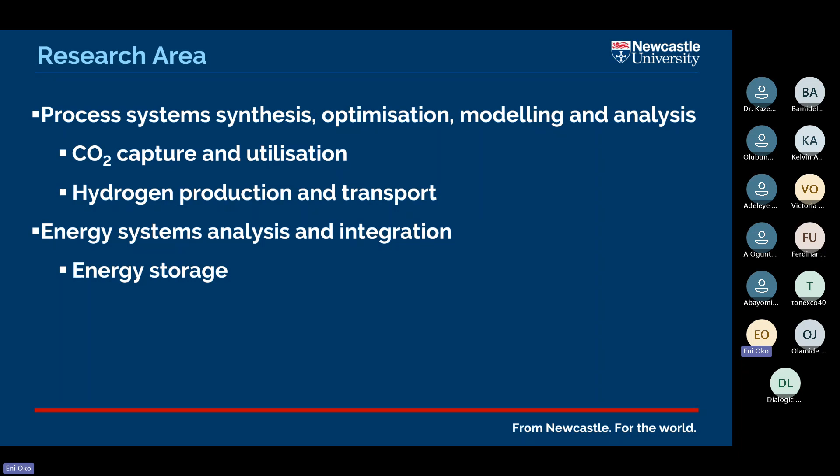On the hydrogen subject, in the past 4 years I've had a number of funded projects, and some of the results I'm sharing today are picked from different projects that we have completed in the past.

Most of these projects are done now, except the first one, which started last year in December. It's a EU Horizon funded project led by myself, but as the technical lead, we had to give up the admin lead of this project to EU partners because of Brexit requirements.

This current project is actually on renewable fuel production with partners from China. We'll have around 4 partners from China, 2 partners from South Africa, 2 partners from Nigeria, 2 partners from Europe, and 4 partners from across United Kingdom.

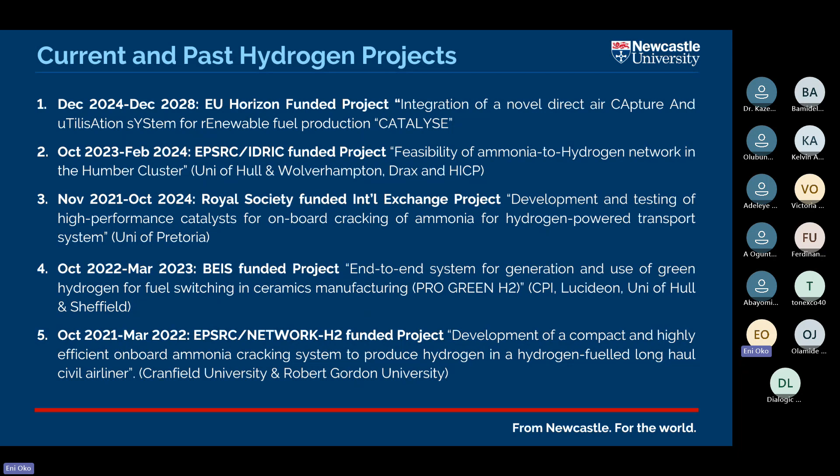Before I get into the rest of the case studies, I thought it was appropriate that we have some kind of background talk to understand the facts that underpin the research that we are doing in this area.

So obviously starting from climate change and whatnot, many countries, including China, have set a target to reach net zero, and most of the targets for many countries fall between 2050 and 2060. Because we are Nigerians, it's also important to highlight that Nigeria has also set a similar target for 2060.

These targets, as I presume everybody on the panel knows, are based on modeled pathways for climate mitigation. On this figure, you can see different modeled pathways. The no climate policies pathway shows that Earth's surface temperature could rise by as high as 4 degrees C, which will be catastrophic.

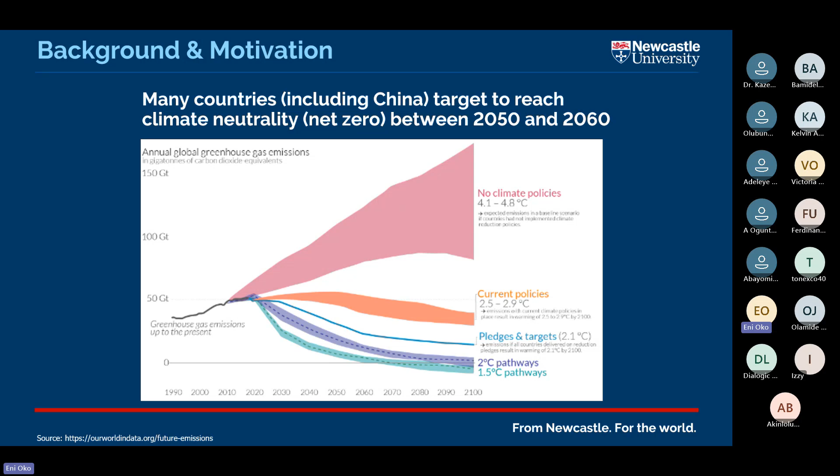Then you have the IPCC pathways, which are the 1.5 degrees pathway and 2 degrees pathway, which highlight that very serious measures will have to be in place to drastically cut down carbon emissions, to keep global warming, Earth surface temperature rises, below 2 degrees C. This is the aspect of these developments that relates to technologies - it's actually where my research fits in.

This is also a bit of that, just providing more context. The IEA has already modeled a portfolio of technologies that would need to be implemented to achieve different scenarios, each of those IPCC UN scenarios, either the 2 degree scenario or the beyond 2 degree scenario, which is the 1.5 degree scenario.

So the key thing for us is that the Intergovernmental Panel on Climate Change, part of the United Nations, is pushing towards the 1.5 degree scenario, which now recognizes fuel switching as a key tool that will have to be in place to achieve this target. So fuel switching means we have to completely move away from the sort of fuel that we use today.

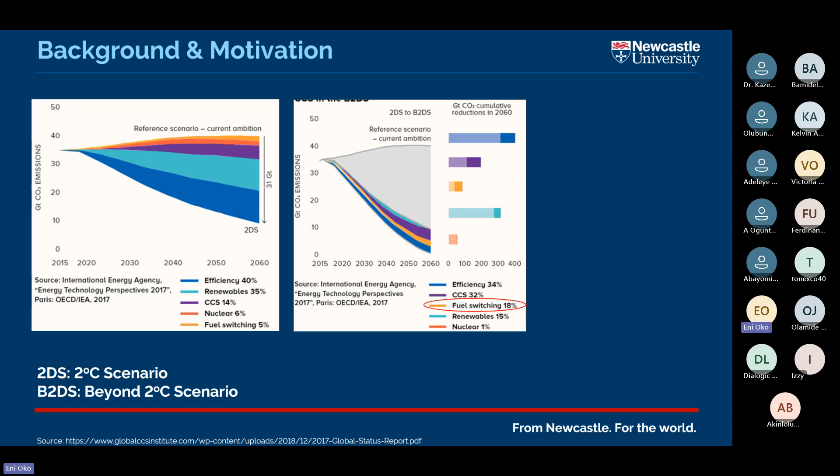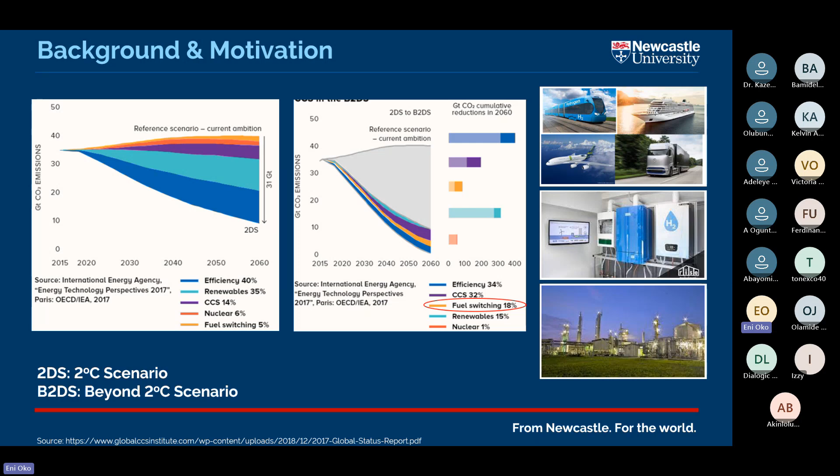And the extent of the implementation could be as much as 18% worldwide to achieve this. This is important because there are some sectors considered hard to abate. Starting from transportation, they are quite difficult to mitigate given the very nature of how they operate. And of course for the UK, for instance, domestic heating and industrial processes, we can't run away from finding an alternative type of fuel to replace the traditional fossil fuel used in these sectors currently.

So it is within this context that we find hydrogen. Hydrogen has very high gravimetric energy density. You can see on this figure that the gravimetric, weight-based energy density of hydrogen is actually higher than what you will find for all the traditional fuels that you can think about.

It's way higher. At the same time, it's important to also note that if you still look at this figure, you find that the volumetric energy density of hydrogen, which is the energy per volume, is actually very low. This is part of the problems I will talk a bit more about today.

So hydrogen has become a very popular option. One, because of the high gravimetric energy. Two, because on combustion it produces only water without any CO2. So worldwide, hydrogen is now considered as a possible alternative, a very excellent one at that, to fossil fuel.

But the hydrogen must come from low carbon sources, and this is why you will find different colors being associated with hydrogen. If you look at this figure, you will see hydrogen is associated with different colors, and that is often linked to the source of hydrogen. In the case of low carbon options, the expectation is that hydrogen will come mostly from electrolysis.

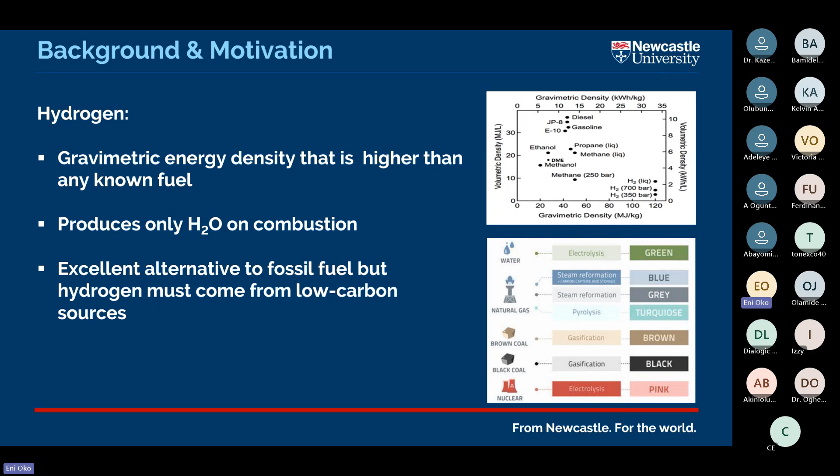Worldwide, different countries now have hydrogen strategies in place. The United Kingdom, China, for instance, the US, Canada, South Africa, Algeria, and in the Middle East. I think around 64 countries now have a hydrogen strategy in place. In Nigeria currently, there is no clear government-backed hydrogen strategy in place.

Although there are some activities ongoing in that regard, and hopefully there's going to be one very soon in Nigeria. I will also highlight later in my presentation why a clear hydrogen policy is very, very important for Nigeria as a country. For the UK and Europe, the objective is essentially to scale green and blue hydrogen production by 2030.

There are several projects ongoing in the UK and Europe in this area. The UK already has around 15 hydrogen filling stations in operation currently. In the UK, sometime last year, there was a plan to do a trial for domestic heating using hydrogen, somewhere in the Teesside area, around Redcar, a village there. But this didn't go ahead because there was a lot of protest against using hydrogen for domestic heating, so it was called off.

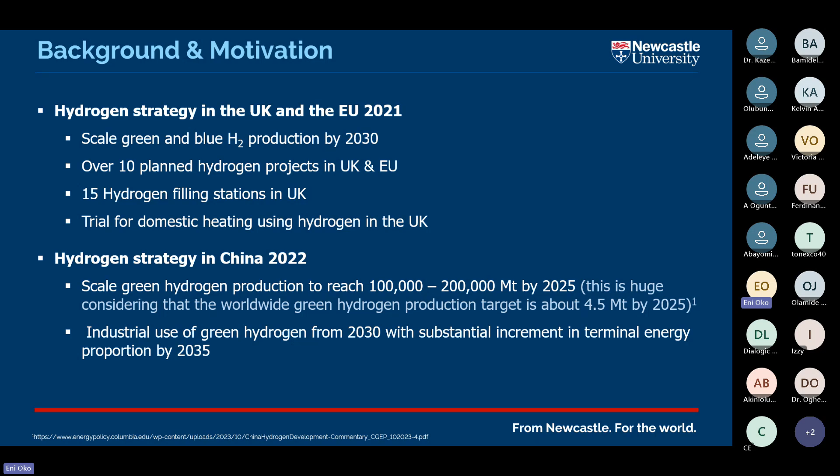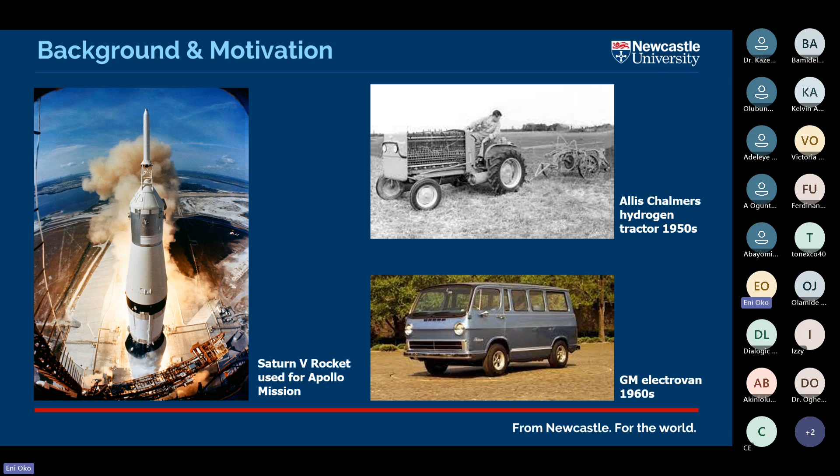What is new is that globally, the interest now is to create a new energy ecosystem that will be completely powered by hydrogen. This new energy ecosystem is what you often hear referred to as the hydrogen economy. So it's not just building specific devices, equipment, or technologies that use hydrogen, but building an entire energy ecosystem, looking at the entire flow, the entire supply chain of energy systems, both at national and international level.

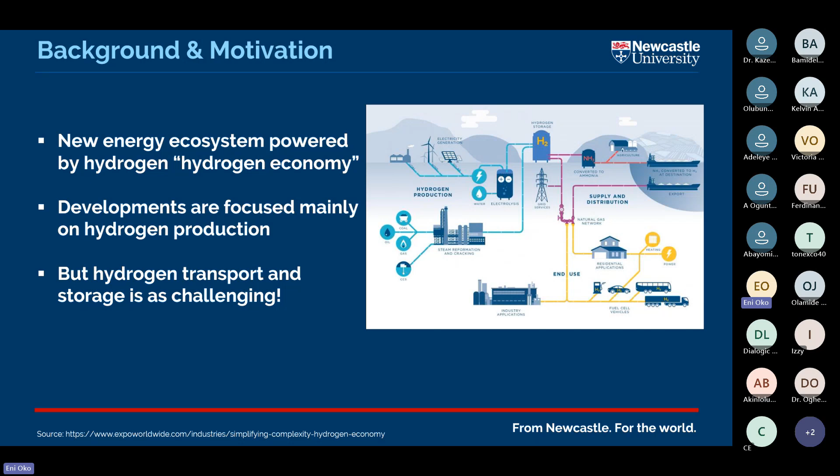Hydrogen transport is challenging, and I want to highlight what makes it very difficult. The first thing is that the volumetric energy density of hydrogen is very low. If you go back to this figure I showed earlier, depending on the condition, either compressed hydrogen in bars or liquid hydrogen, compared with diesel, you can see the volumetric energy density of diesel is over 10, while that of compressed hydrogen is under 2. So give or take, it's roughly 6 times lower compared to diesel, gasoline, jet fuel, etc.

The implication of this is that you will require large fuel storage compartments. To put that in context, if you had a small car that uses hydrogen, and wanted to put in the same amount of energy as a diesel car equivalent, like for like, to have the same mileage: let's say you have a diesel car with a fuel storage compartment of 50 liters. To put the same amount of energy for similar mileage in a hydrogen fuel car, you would require about 6 times that capacity - so around 300 liters of fuel storage volume.

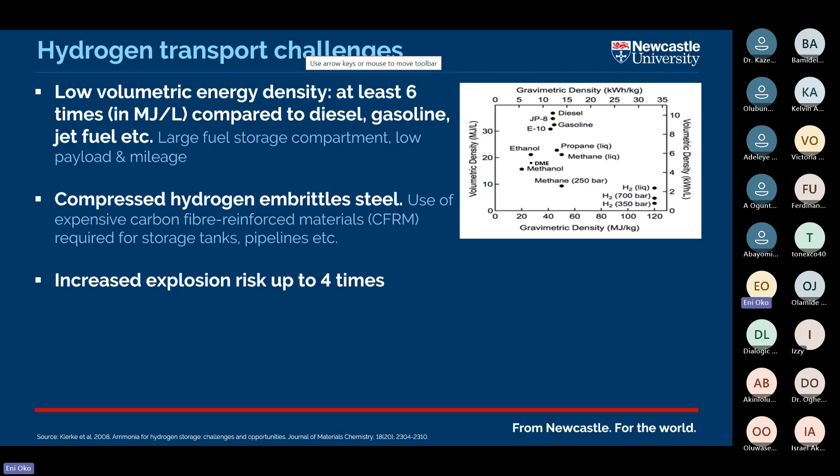So those are some of the various challenges and different aspects of hydrogen storage and transport. Research is focused on how to address some of these problems.

Here is an example of a commercially available vehicle by Toyota, called the Toyota Mirai, that uses hydrogen. In this vehicle, the hydrogen storage space is quite massive, and you are only carrying around 5 kg of fuel. So inside this vehicle, a good chunk of the space that you would usually find in a similar sized vehicle that uses diesel or petrol is completely used up for the storage facility.

The boot space is also incredibly small, because more than half of the boot space is where the storage tank is kept. The other point is that the hydrogen in the system is stored at a pressure of 700 bar, which is enough to discourage anybody from getting into this vehicle. Then the last point is that for this vehicle, the fueling can be quite tricky, because at the fueling station the hydrogen is often available in the form of liquid hydrogen and is extremely cold, and this sometimes creates problems during refueling of the vehicle.

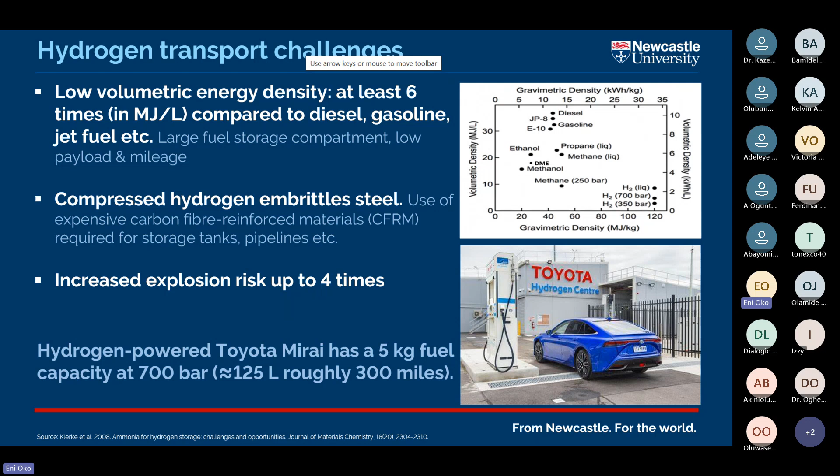So just looking at that a bit more, trying to paint more of a picture of how small the volumetric density of hydrogen is: if you look at this figure, you see a storage volume for around 10 kg of hydrogen at a pressure of 200 bar, and the density at that point is around 14 grams per liter. If you compare that with ammonia, for instance, you see that for a much smaller storage volume, you have around 96 kg compared to 10 kg.

Even for liquefied hydrogen, the volume is smaller and the density is higher, but you are only able to carry a very small amount of hydrogen in terms of kg compared with liquid ammonia. Take note that this liquid ammonia is being stored at a relatively low pressure, around atmospheric condition, which is a point to note.

Part of what is now being considered is using a derivative—in other words, using a chemical compound that contains hydrogen as a means of storing and transporting it. One such material is ammonia. Ammonia contains hydrogen, and it can become a vehicle for transporting and storing hydrogen.

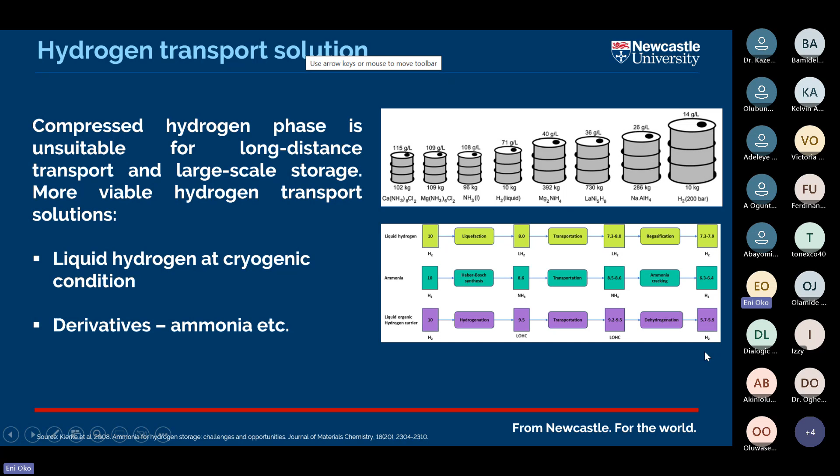Going forward, looking at some of these derivatives, the first class uses materials such as zeolite, polymeric materials, and MOFs, where hydrogen can be added to this type of material. No chemical reaction is required—hydrogen can just be adsorbed on the surface of these materials, but this happens at a very low temperature.

For most known adsorbents for hydrogen storage, their hydrogen capacity is quite low, under 10 weight percent. Then you have the liquid organic compounds, with a number of examples. As mentioned, part of the problem is the very high energy requirement to dehydrogenate them. The technology readiness is quite low since they are emerging in this area, and the overall hydrogen capacity is also low.

There are several other examples: ammonia, metal hydrides, methanol, and DME—all potential candidates for transporting and storing hydrogen.

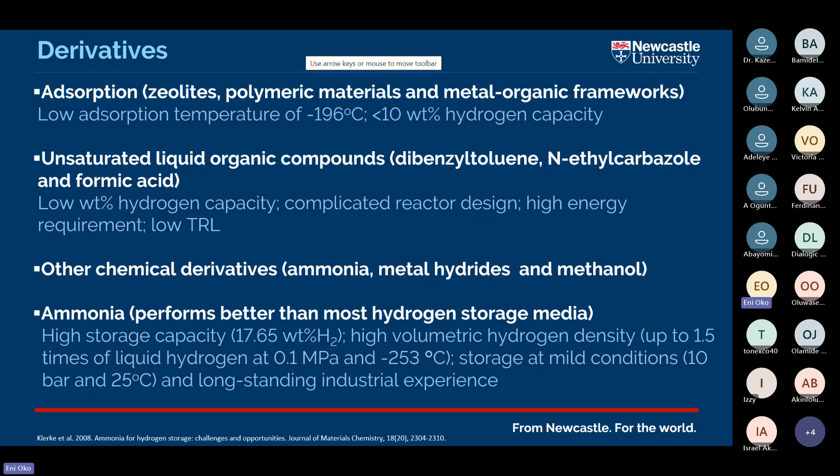This figure tries to show where ammonia stands compared to other potential carriers of hydrogen. You can see where ammonia is in terms of volumetric density and gravimetric hydrogen density—it is quite well placed compared to several others. With the advantage of ammonia being well established in the industry, it becomes a no-brainer that ammonia has become very famous in this regard.

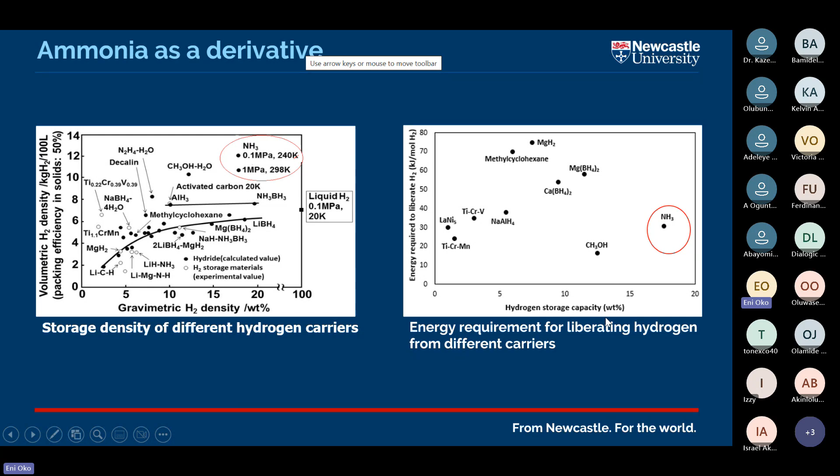Then, obviously, the other question raised is the energy required to decompose ammonia to recover hydrogen. This is not trivial—the energy requirement is quite high—but when you compare ammonia with several other established compounds, it is still relatively low. Its biggest rival is methanol, but in terms of hydrogen capacity, ammonia is actually better than methanol.

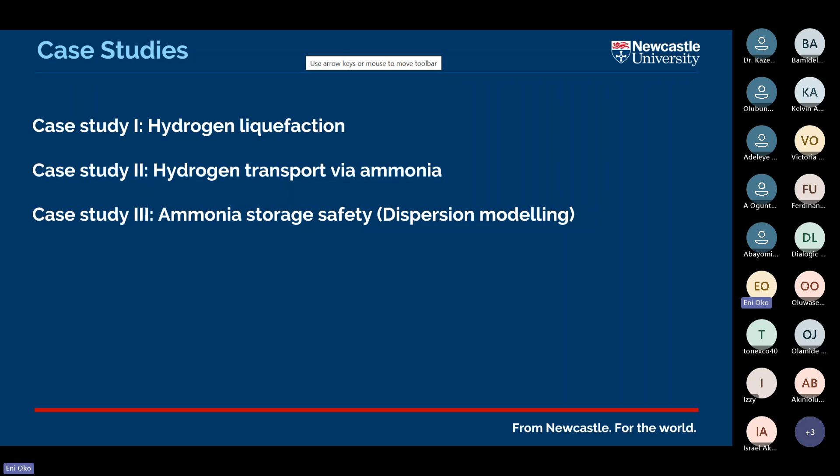So this brings me to the case studies I wanted to talk about today. I want to cover 3 case studies. The first one is around hydrogen liquefaction. I already highlighted that hydrogen liquids have better volumetric density compared to compressed hydrogen, so depending on the distance of transport, liquid hydrogen could become the medium for transporting and storing hydrogen. In that case, hydrogen liquefaction becomes a subject to talk about. Then I'll talk about hydrogen transport through ammonia, and the last one relates to safety, work we've done on ammonia storage safety, looking at dispersion modeling and similar topics. So starting with Doc, yes, Doc, please.

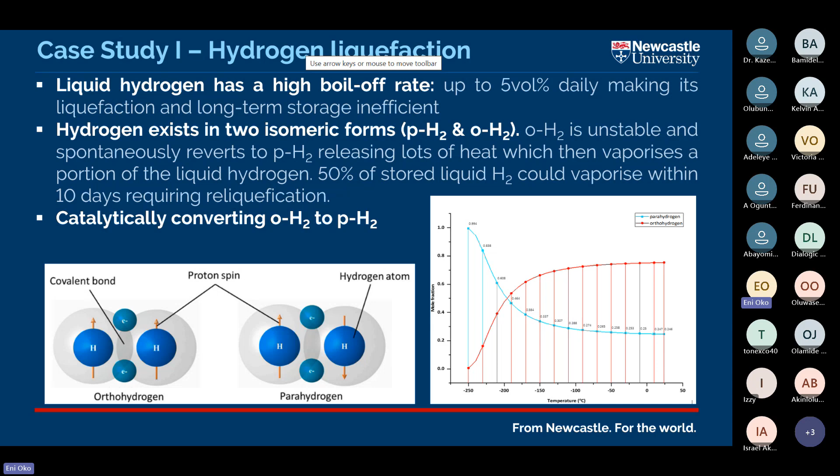Maybe that's too much to talk about given the diversity of the audience, but hydrogen exists in two forms, and oftentimes it will move from one form to another, and that process produces a lot of heat, which warms up the liquid hydrogen, leading to the evaporation of a portion of it. So part of the development here is to develop a catalytic conversion system able to convert the less stable O hydrogen to the more stable P hydrogen. This is essentially what we did in this case.

So we conducted a comprehensive exergy assessment around this, looking at different process configurations, ones heavily based on the O hydrogen systems and ones based on the P hydrogen system. This is what the process looks like, and we developed the cryogenic system, a catalytic conversion system embedded within the body of the heat exchangers. So instead of having completely separate reactor systems where the catalytic step is implemented, we developed a new reactor design embedded within the body of the heat exchanger, kind of intensifying the process.

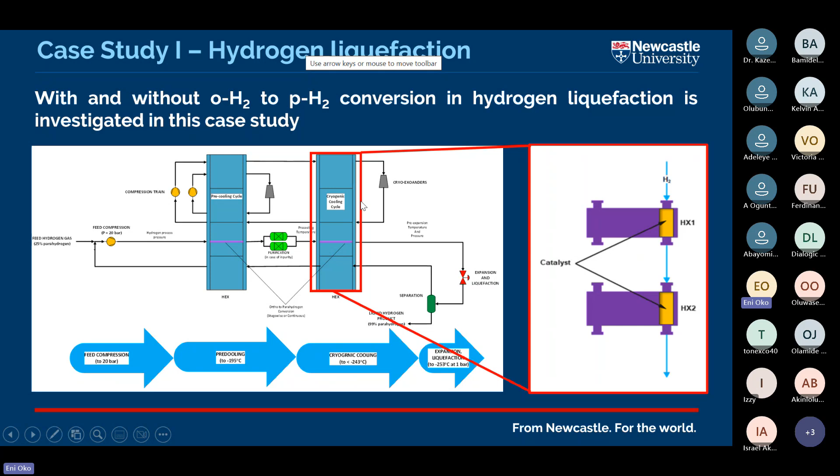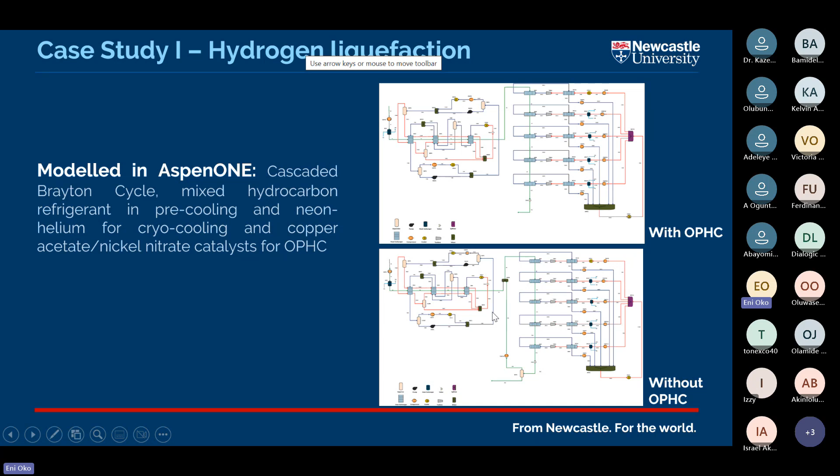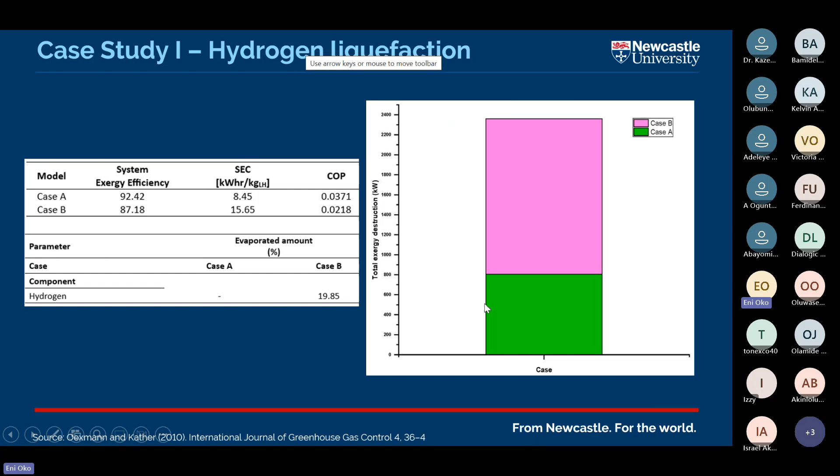Very detailed comprehensive models were implemented using software called AspenONE, considering different scenarios: one considered this conversion step I've spoken about, and one did not. We looked at the specific energy consumptions between them, and clearly the one with the conversion step has better performance in terms of energy utilization. This is published in the International Journal of Hydrogen Energy, and you can have a look if you're interested to read more.

The second case study is about ammonia, and this figure highlights what I said before: transporting hydrogen, especially long distance, incurs a lot of boil-off, and this significantly adds to the cost of transporting hydrogen. To put that in perspective, looking at LNG, ammonia, and hydrogen boil-off rates, hydrogen's is many times higher compared to LNG and ammonia.

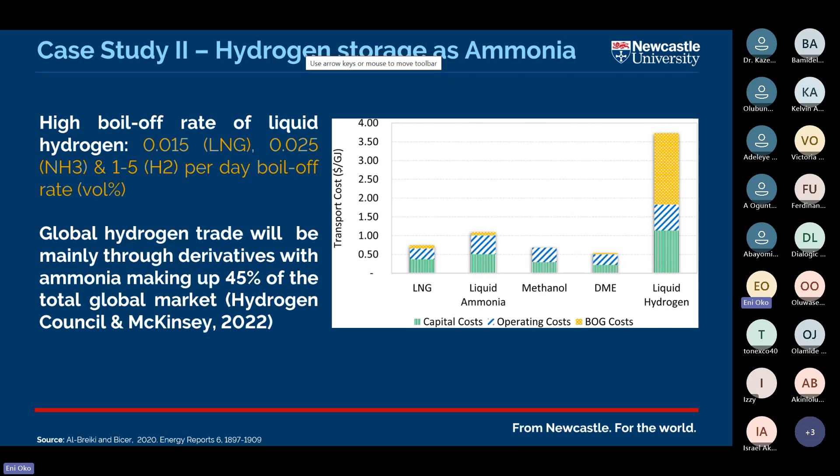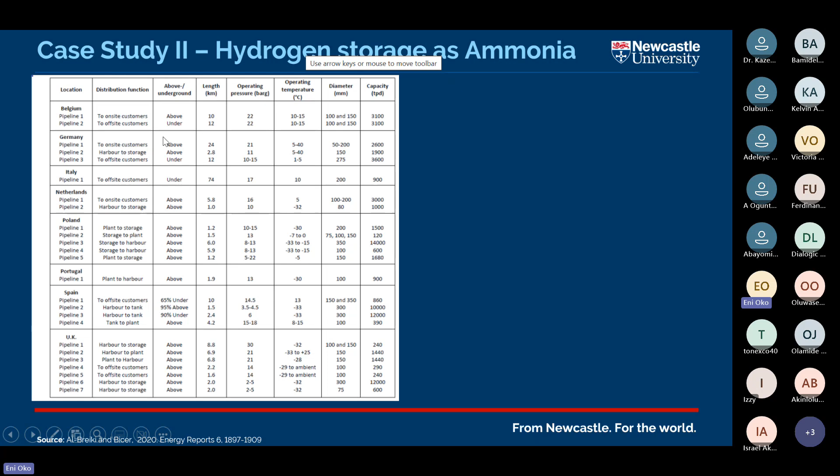McKinsey reports for the Hydrogen Council already predict that at least 45% of the global hydrogen market will be traded in the form of ammonia. This is a sample of existing infrastructure for ammonia transport across Europe, including the UK, so you can see all these things are already there. In the US, there are over 5,000 kilometers of pipeline already transporting ammonia. Between Russia and Ukraine, over 2,000 km of pipeline transporting ammonia.

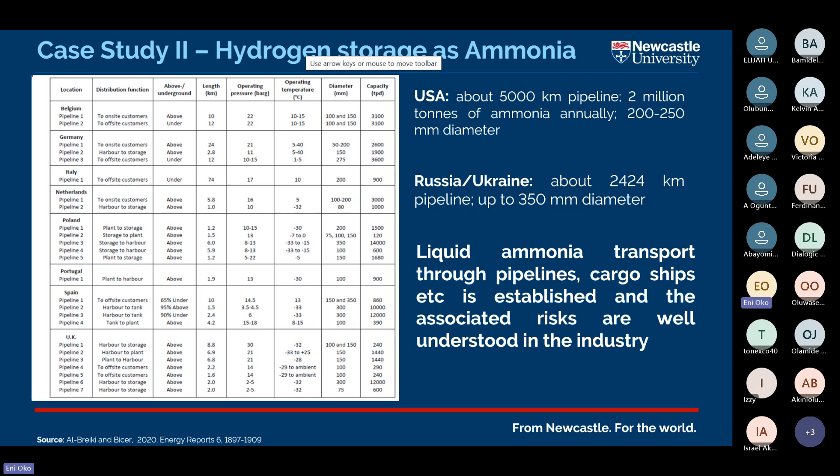So it's safe to say that transporting ammonia through pipelines, cargo ships, etc. is established, and the associated risks are well understood in the industry. The UK has interest in quite a bit of activities here. There's been a UK government report considering imports of hydrogen in the form of ammonia from different regions: one from North Africa, Algeria, another from the Middle East, Saudi Arabia and UAE, and the last from Australia. The point of this import is that the UK does not have the capacity to produce enough hydrogen locally to meet its needs.

So that difference is very much going to be imported, and this consideration of originating nations is based on the countries that have the highest potential to produce very cheap hydrogen.

That way, the UK can remain competitive in terms of the cost of acquiring energy. So when ammonia imported from wherever lands in the UK, there is consideration as to whether we will build a central facility where the ammonia is decomposed to produce hydrogen and supply it to end users—what we call centralized ammonia cracking—or whether you transport ammonia instead, and at the point of use, like a filling station, have a smaller scale cracking facility where it can be cracked and then supply hydrogen.

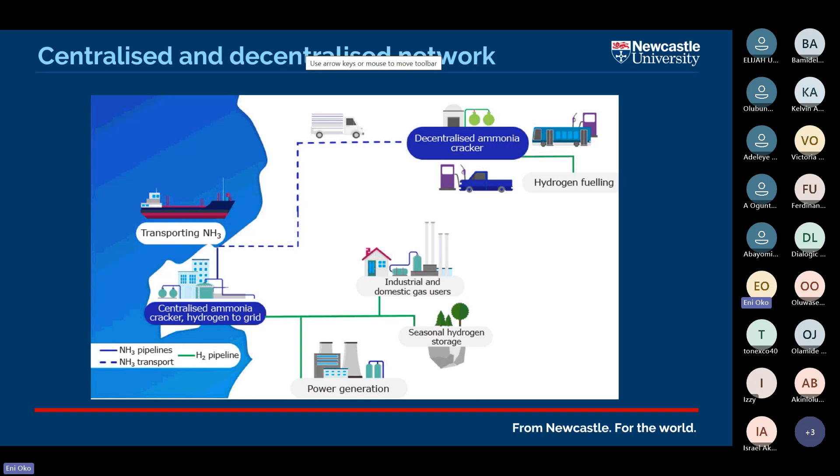Our assessment has considered these scenarios and tries to do a detailed, comprehensive, comparative assessment. For the UK, part of our work was carrying out a comprehensive review of these systems, looking at supply chain models and process models.

Initially, we started off with the mindset of decentralized ammonia cracking within industrial clusters. In the UK, you have different industrial clusters, and our assessment looked at these clusters where you have a lot of industries that could become potential off-takers of this hydrogen. If we deliver ammonia to these clusters, it can be cracked either on a central basis or on a decentralized basis.

On a decentralized basis within industrial clusters, we find this is very favorable for a number of reasons. One is that the cracking process is very energy intensive, and carrying it out within the vicinity of an industrial plant presents opportunities for heat integration with the end user plant, which enables greater energy efficiency.

The other point is that decentralized cracking presents an opportunity for a phased rollout. This is important because companies will not embrace the use of hydrogen at the same time. So the question is: do you build a very big plant that operates at low capacity, and as more companies embrace hydrogen, you ramp up production? There's a lot of economic uncertainty around such a model.

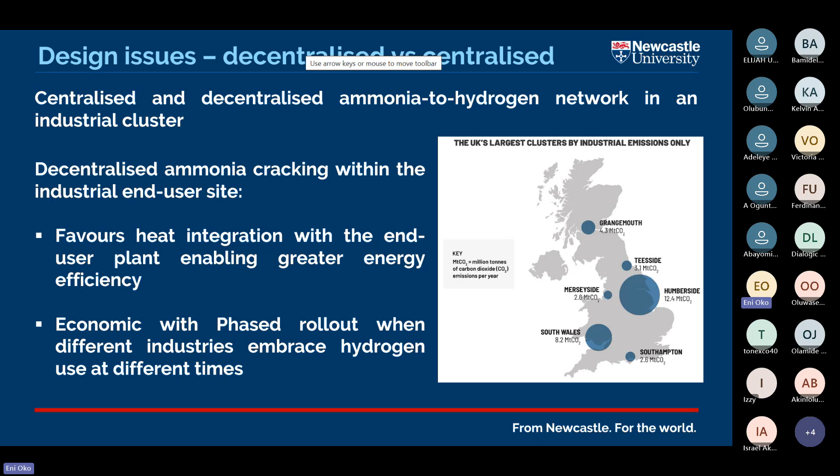Thankfully, in the UK, there is already a company called AFC Energy that has invested in building this sort of modular scale ammonia cracking system.

Our case study looks at the Humber region, because it represents the largest industrial cluster in the UK. Our work mapped all the potential end users within the region. This region has around 3 of the UK's 6 refineries, which helps put into perspective the scale of industries located within the region.

So we did all that mapping, and we also did a bit of geographical study. In the UK, the National Grid already has a pipeline route developed for this region, and in developing our pipeline design, we considered the existing A1 route, which is an established pipeline route for this region.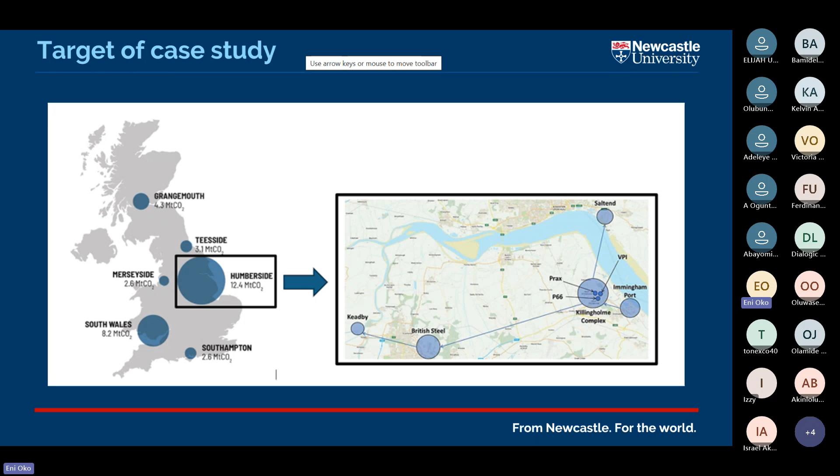The other thing is that there's an existing port where a company called Air Products has already received approval to develop an ammonia import site within the area. Those are some of the companies considered in developing our pipeline model.

We used the software Google Earth, which has a capacity for us to model topographical changes within the area. So we used Google Earth to do topographical mapping of the area and obtained a very detailed representation of the topographical changes in the area.

Everybody here is an engineer, and we know that topographical elevation changes—remember our Bernoulli equation—elevation changes play a role in determining pressure and pressure losses across the pipeline. So it's very key to modeling the pipeline. This is what we've used the Google Earth software to model.

This was the existing pathway for the pipeline in the area, and this was kind of imposed on the Google Earth model. Okay, I will come back to highlight some of the results.

The other key thing in your hydrogen, in your ammonia transport, is to consider the cracking process. Of course you need a reactor to crack the ammonia to obtain your hydrogen. The problem is that it is highly endothermic, meaning you require a lot of energy input, and without catalyst this could be operating at as high as 900 degrees C. The other problem is that it's equilibrium limited.

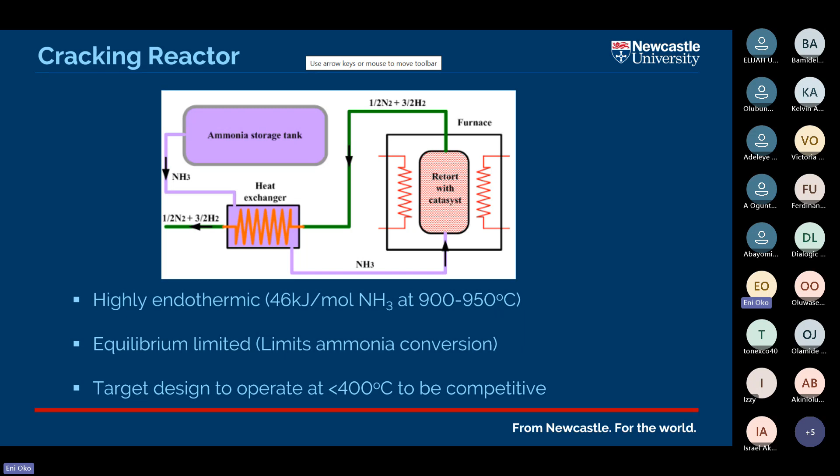What it means is that essentially as the ammonia is breaking down to form nitrogen and hydrogen, a part of it will be recombining to form ammonia. So that makes the process design a bit difficult. Our project was looking at developing a new catalytic system to operate at significantly lower temperature. So we considered different designs for reactors.

We looked at tubular reactors. In these tubular reactors, essentially you have the ammonia cracked, and then it goes through a separation process where you separate the hydrogen from the nitrogen, and then any unreacted ammonia could be returned.

We also looked at reactor systems called catalytic membrane reactors, and these sort of reactors embed the separation process within the reactors. The benefit of the CMR is that it's able to remove the hydrogen as it is formed, and because it is removing the hydrogen, it keeps - if you guys remember Le Chatelier's principle from secondary school - the reaction going in the forward direction at all times.

The benefit is that you are able to achieve very high conversion, very high hydrogen purity, and the sizes could be relatively smaller compared to the tubular reactors. But the problem is that the membrane system is currently being developed using a palladium membrane, which is very expensive and is also a critical raw material.

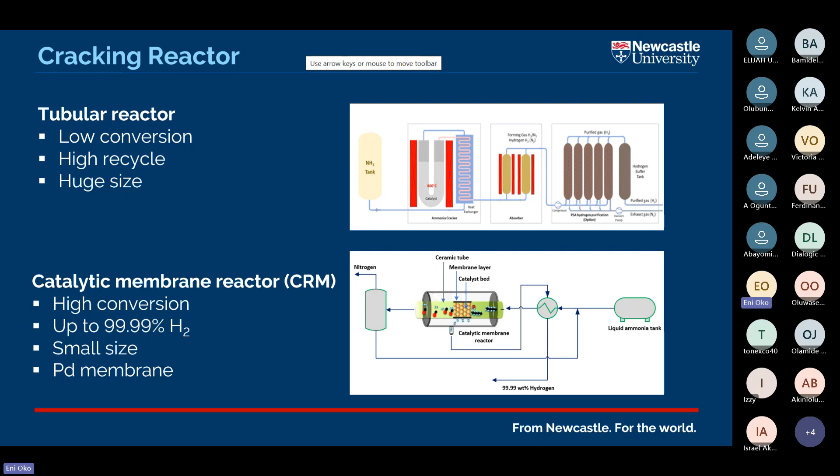The UK and the European Union encourage that development should move away from critical raw materials. So we had other people we work with on membranes, and they were focused on developing a new type of membrane system that doesn't use the palladium membrane. But our initial work is based on using the palladium membrane.

So these are some results for the tubular reactor. I'm sorry, I have to run off a bit.

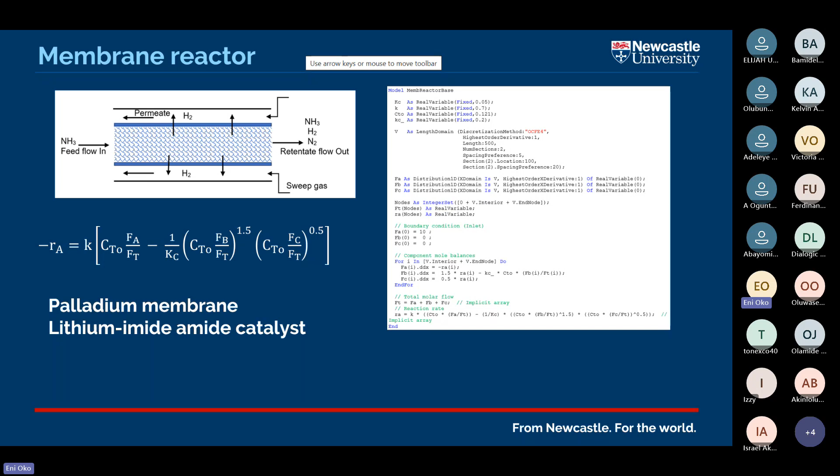For the membrane reactor, this was coded completely from first principles, and we based our reaction system using a type of catalyst called the lithium-imide catalyst - can talk about that if anybody has questions. We got some results from the membrane reactor systems. And then the other one is the pipeline design system.

For our pipeline design system, we looked at different design scenarios - around 4 design scenarios. The first 2 scenarios was looking at having a central cracking facility where you crack the ammonia and then transport your hydrogen. The other scenarios, 3 and 4, look at where you have this modular ammonia cracking within the vicinity of the end user industrial plant.

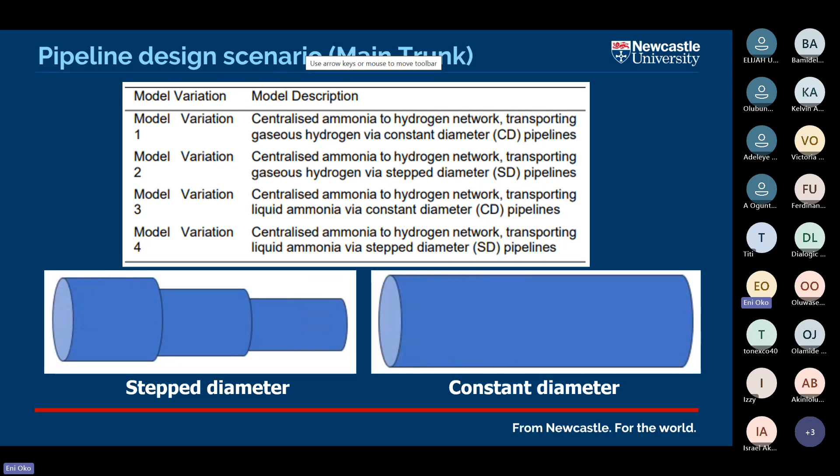The other scenario considered what we call the stepped and constant diameter pipeline. So you have a pipeline where the diameter reduces as the number of end users along the way decreases, since you will not need to be transporting as much. And the constant diameter where you have just a large pipeline diameter from start to finish.

So we had a detailed pipeline design methodology based on this, and used different design methodologies to size our pipelines. One thing key across different pipeline design methods is that the ammonia transport pipelines, as I expected, are significantly smaller compared to

the hydrogen pipelines. We also did quite a bit of economic analysis, looking at the different models to determine what that looks like. For the case of ammonia transport pipelines, the numbers were much better in terms of ROI and payback time, as well as the NPV.

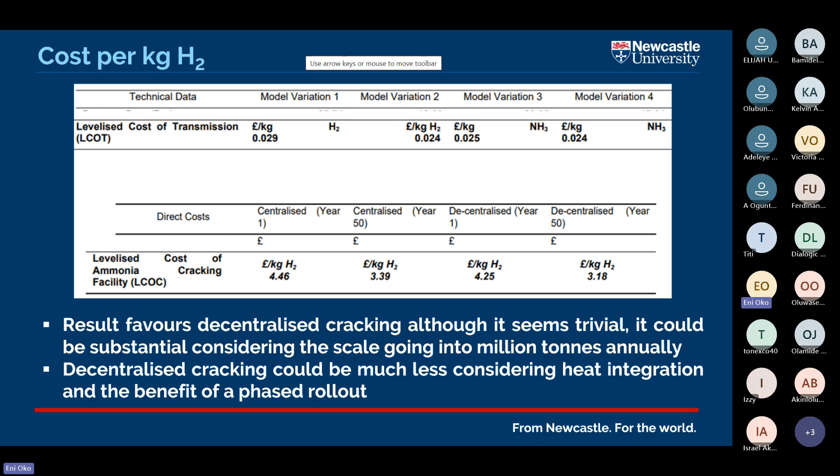Then in terms of cost, we also found that the cost, especially for the stepped pipelines, was much better compared to the constant diameter pipelines. The constant diameter pipelines were significantly higher compared to the stepped diameter pipeline. The last case study is looking at safety.

As I've mentioned, this is the Immingham terminal in the Humber region. The Immingham terminal is where a company called Air Products is trying to develop ammonia import sites, to essentially expand the capacities around here so the UK can import ammonia through this site. Doing this means the expectation is that lots and lots of ammonia is going to be imported, and then you are going to have these massive ammonia storage tanks.

So this study was looking at all the hazard scenarios around here, because you have the village Immingham, which is not very far from here, and trying to understand what could happen in the event that something goes wrong in this area. The terminal in development is called the Immingham Green Energy Terminal, IGET.

It's estimated to cost around 170 million pounds. Government has already given a go-ahead for this, and it's being co-developed by a company called Air Products. It's expected that at full capacity, we'll be producing around 105 metric tons of hydrogen per day, and this could go up to 210 in the future.

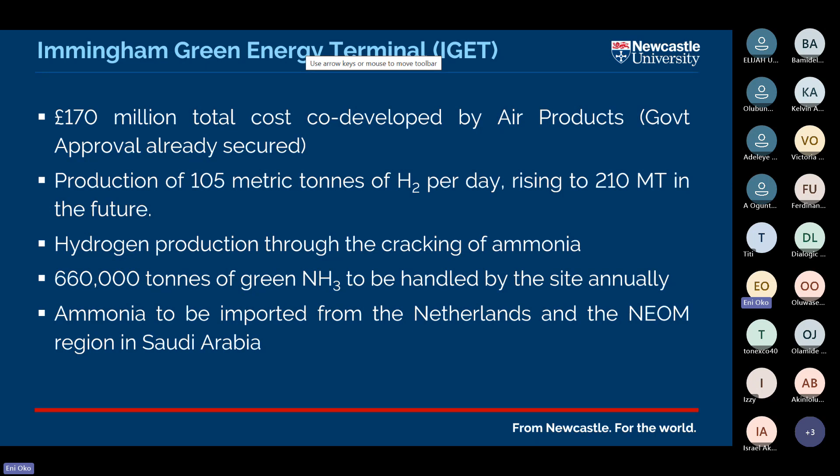So 660,000 tons of green ammonia to be handled by the site annually. It's quite massive. And ammonia is to be imported from the Netherlands and the NEOM region in Saudi Arabia.

To be able to do this sort of analysis, we did something called QRA, Chemical Process Quantitative Risk Assessment, which has two components: consequence modeling, and using the results from our consequence modeling and feeding that into performing a quantitative risk assessment. The work we've done so far is looking at the consequence modeling aspect of it.

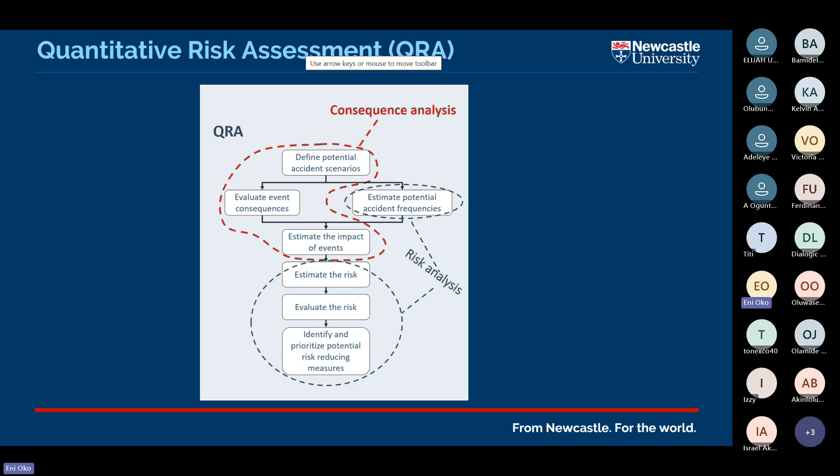For the consequence modeling, we wanted to develop a dispersion model because what we are essentially trying to do is, in the event that there is a leak, how will the ammonia disperse and how it will potentially impact on communities around there. So we've used the Gaussian plume model to do the dispersion modeling. The next stage of this work could be using CFD to do more rigorous modeling of the plume dispersion.

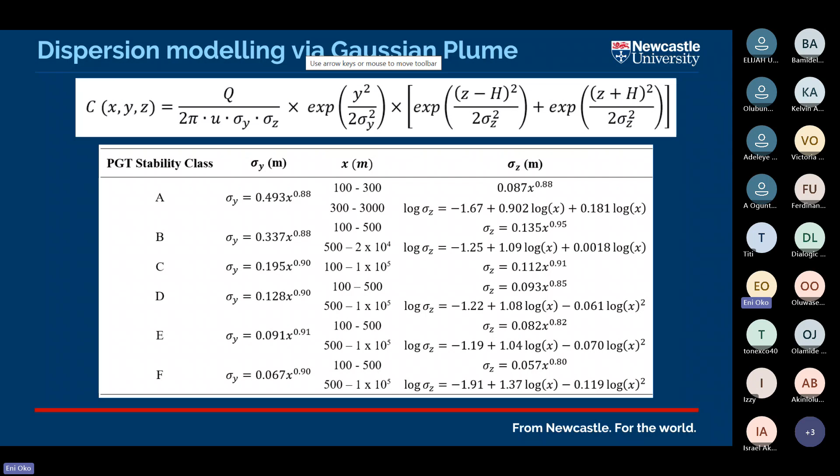Part of what we found is that our GP model, our very detailed Gaussian plume model, this has been submitted and hopefully will be published very soon. It's already gone through first review, and we are waiting for the final outcome from the International Journal of Hydrogen Energy.

Part of what we found from this comprehensive validation was that the GP model was not good for near field sources. By near field, we mean that if you have an ammonia storage tank, for distances of up to 100 meters from the storage tank, the GP model tends to be very poor in predicting the system. But beyond the distance of a 100 meter perimeter around the emission source, the GP model gave a very good prediction of the system.

So the new CFD model that we are developing is now focused on the near field system, trying to accurately represent how the plume develops within a distance of 100 meters from the emission source.

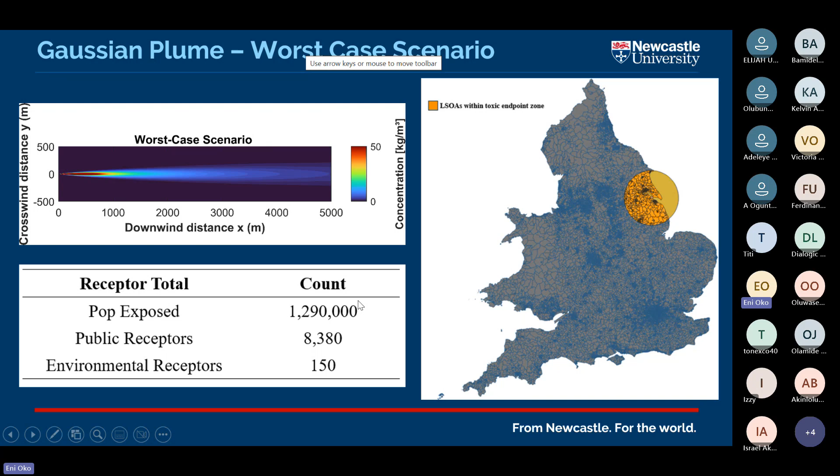So from this assessment, we found that there's quite a broad area where this could go depending on the scale of the emission, and we could have as much as a population of over 1 million being exposed to ammonia leaks in the event of a failure.

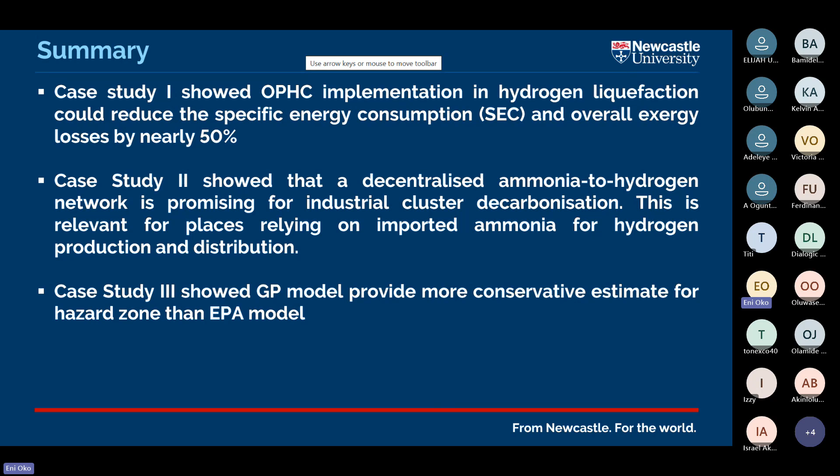And that will be the end of my presentation. I hope we can have a chat more, and I can talk a bit more about the work. So thank you so much.